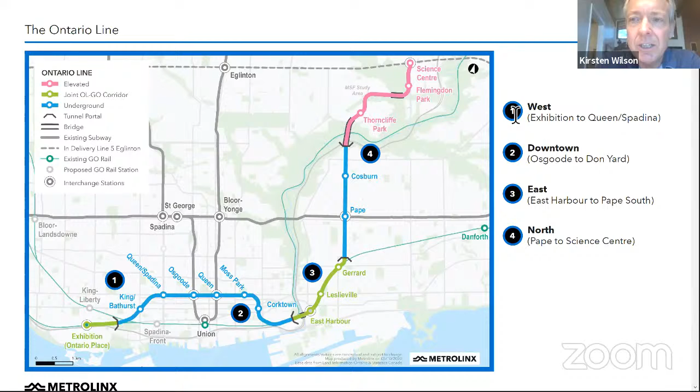We've broken it into four parts: the west, the downtown, the east, and the north. This is probably a good time for us to talk about our public consultation and briefings. Josh, perhaps you'd like to talk to that.

Sure. Like Malcolm said, the website has been our primary vehicle for getting information out to people, and we were excited to release the latest update. It's always challenging in a project like this because a lot of work has to happen in the background by our engineering and design teams before we can share it with the public. But we factored in a lot of what we heard from the open houses in January and February, posted that information online starting a few weeks ago, and are now concluding meetings with elected officials and beginning more public meetings.

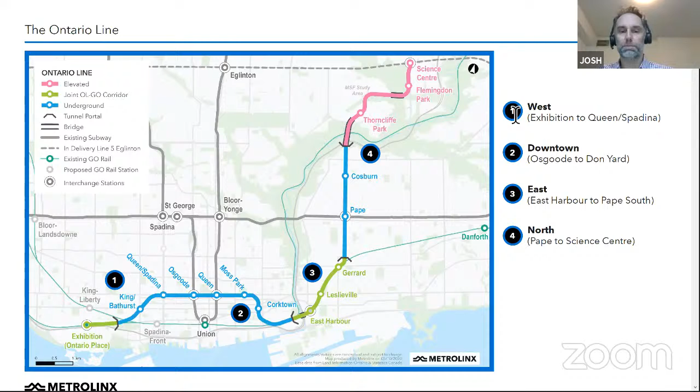This is actually our first of what we hope are many open public meetings, and we're really grateful to MPP Glover and his staff for hosting us. We're also looking forward to opening a couple of community offices, hopefully by the end of 2020. That'll give us a chance to talk with people in various neighborhoods along the alignment, answer questions, and keep you updated as the project progresses. Thank you, Josh. We could go to the next slide.

So some of the benefits associated with the Ontario line. One of the primary benefits is the relief to Line 1, which is very congested, especially south of Yonge and Bloor and at the Yonge Bloor station itself. We're anticipating a significant reduction of almost 19% at Yonge Bloor station, and we're also projecting significant congestion relief at Union Station, as well as at the Line 1 interface up at Eglinton Station.

We're also building the Ontario line into some new communities, Thorncliffe Park and Flemington Park, which are priority communities for us to get higher order transit into, so that travel times to their places of work, entertainment and back home will be cut almost in half, which is a true benefit to the customers we'll be serving.

We're breaking the project up into three very large contracts. The first is the Rolling Stock Systems Operations and Maintenance contract, which we call the RSSOM contract. It's a design, build, operate, maintain contract. They'll be responsible for installing the systems, the vehicles, the maintenance and storage facility, the control systems, the control room, and then they'll have a 30-year concession operating and maintaining the Ontario line.

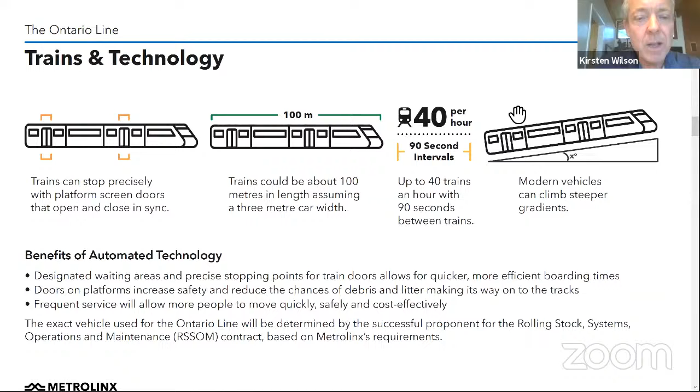The benefits of these trains is that they're completely automated, which means the stopping and starting points are very accurate. Coming into the stations, the stopping and acceleration out of the station is very controlled and programmed to ensure a smooth, comfortable, quiet ride for our customers and for the community we're going through. The entire program allows us to come in and out of the ground on slightly steeper gradients, which enables us to come out up in Thorncliffe Park, as well as along the shared corridor.

I'm going to pass this over to James Francis now, and he'll talk about the environmental reports that are currently out for comment. Thanks, Malcolm.

So as Malcolm mentioned, we currently have our first round of environmental reports out for public review and comment. This is the draft environmental conditions report. In it, we look at existing conditions for the environment across the entire Ontario Line study area, tip to tail from the Science Centre to Exhibition, covering aspects like archaeology, cultural heritage, noise and vibration, the natural environment, socioeconomics and land use, air quality, traffic and transportation, and soil and groundwater.

So we're very much seeking your review and any feedback you may have on this report. It's on our website, and once we digest the comments we receive, we'll update the report and post the final version on our website for review.

Looking ahead, we are planning early works at Exhibition Station, the Lower Don Bridges, and along the Joint Corridor, and we'll be undertaking an impact assessment looking at the environmental impacts of those specific works, sharing that for public review and comment in a draft early works report. We anticipate sharing that later this year.

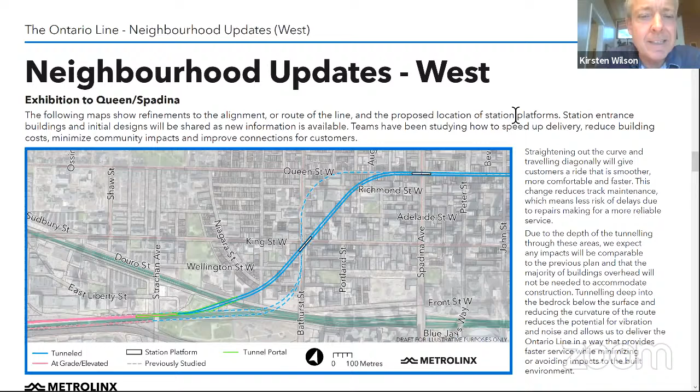This is Exhibition. One of the areas we're quite excited about is bringing higher order transit down into the Liberty Village area, and Exhibition Station will have direct access to Liberty Village. We're coordinating well with the city and TTC to build the new Liberty Street, which has an environmental assessment completed. This station will also interface with GO Transit and GO operations to provide an alternative to get downtown without going through Union Station. It'll also be a destination for access to the exhibition, all its amenities, as well as Ontario Place.

Next slide, Josh. So in order to launch a tunnel boring machine, we need to dig a hole in the ground and drop the tunnel boring machines into those holes and then progress.

One of the places we're intending to begin tunneling from is Ordnance Triangle Park. We're going to occupy that park for a period of time, and we'll try to maintain as much of it as we can, but it is a fairly large operation launching a tunnel boring machine. There will be two of these machines going from here towards downtown and towards Queen Station. When we're done, everything will get filled back in, and we'll return the park to the city to develop the programming spaces in this area.

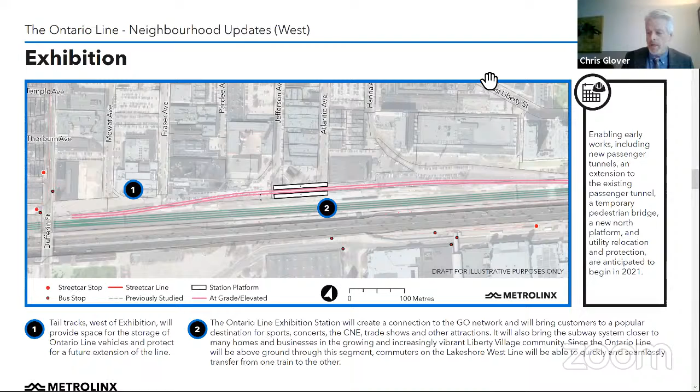Next slide. Actually, I've got a couple of questions about Exhibition station, so maybe we'll just take them now. Where exactly will it be located, and what will it look like in terms of size and accessibility? And the final question is, why are there no stops between Exhibition Place and King Street? Wouldn't it make sense to have a stop that serves the Fort York City Place area?

Okay, so first off, we're building the station on the north side of the existing GO corridor. The intent here is to have a through-pass that will allow community members up in Liberty Village to use the subway station to get to Exhibition, BMO Field, Ontario Place, or any of the amenities at Exhibition. It will be accessible in the sense that we'll have redundant elevators for accessibility at all times, as well as stairs and escalators.

Regarding your question about an interstitial site or station around the Fort York area, we try to space our stations at certain intervals that make sense. It's a challenge when you have stations too closely spaced, and we do have a few that are closer than we'd like. It really affects our ability to maintain headways properly.

When we evaluated the areas, we wanted to, number one, serve neighborhoods, and number two, have good connectivity with the existing surface transit network. At King Bathurst, we pick up both the Bathurst and King streetcars, which will be very beneficial to the crowding currently experienced on both. The opportunity to add an additional underground station there, we didn't feel it would be well served. We're better served with the locations we have.

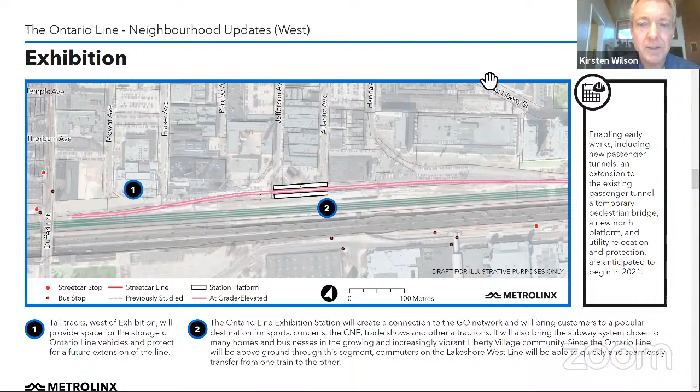Stations are the most expensive component of the subway build. They come in anywhere from $250 to $350 million each, so you want to site them very carefully and not install too many. Thank you very much.

Next slide. As we go into the downtown section, this runs from Osgoode all the way down to the Don Yard, and is a downtown component. It's tunneled construction in a very dense neighborhood, as was the West.

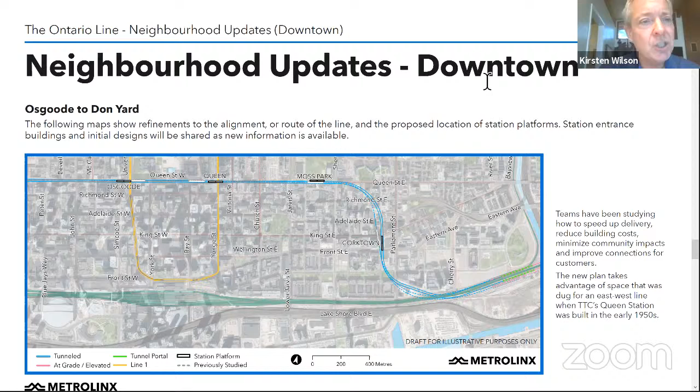Next slide, Josh. Osgoode Station looks a lot like the Relief Line South station, except we've moved it a little further to the west. In doing so, we're now straddling Line 1, which makes connectivity much better between Line 1 and the new Ontario Line. We're building two new entrances, one on the northeast corner near Osgoode, and one on the southwest corner near Simcoe Street.

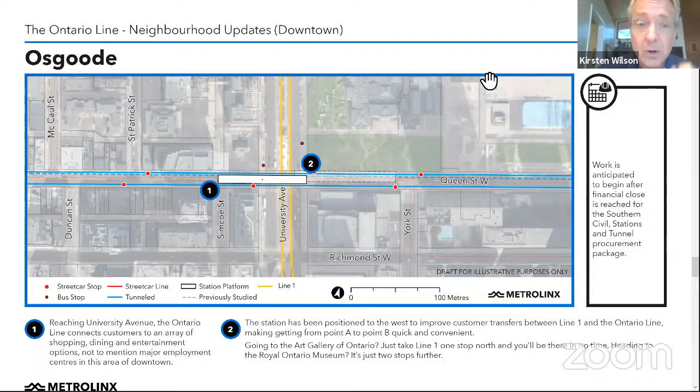Next slide. This is Queen Station. Similarly, Queen Station was a little further west. We've moved it during the design evolution a little further east to again straddle Line 1 at Queen Station, to create connectivity to virtually every corner here. This is also a very important station for us because it has great connectivity to the PATH network, which will allow people to get to their places of employment much easier.

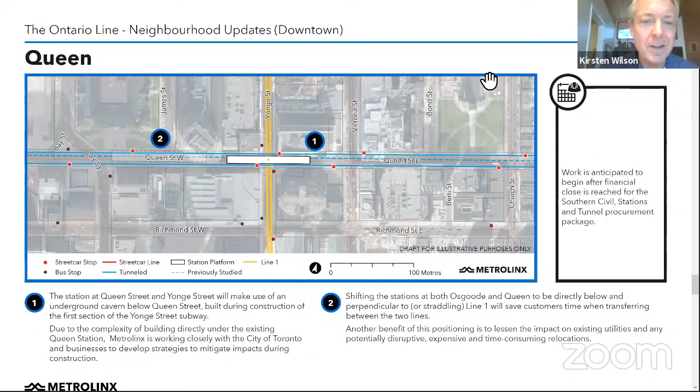So Malcolm, last time I had this briefing, you mentioned Queen Station has a GO station under Queen Street that was designed for this, and that you're actually going to be utilizing that station. Is that accurate, or is that still in the plans? It's actually not a GO station, it's a TTC streetcar station. There were aspirations long ago that the Queen Street streetcar might go underground in this location. There's infrastructure built there, and we're going to tie into that in order to get underneath Line 1 to both platforms on the east and west side of the existing Queen Station. So we're absolutely going to be utilizing the infrastructure that's there for our benefit. Okay, thank you.

As we move further east, we come to Moss Park. Here we're moving the construction out of Queen Street, and we're going to do it in an open cut format. We'll have an entrance on the corner of Sherbourne and Queen Street. The reason we moved it into the park is we're trying to minimize impact to the road network, because we're constructing across the entire city, 15.5 kilometers, 15 stations. It's a lot of work to be executing in the same period of time. This is a very important station because it also serves priority neighborhoods north of here.

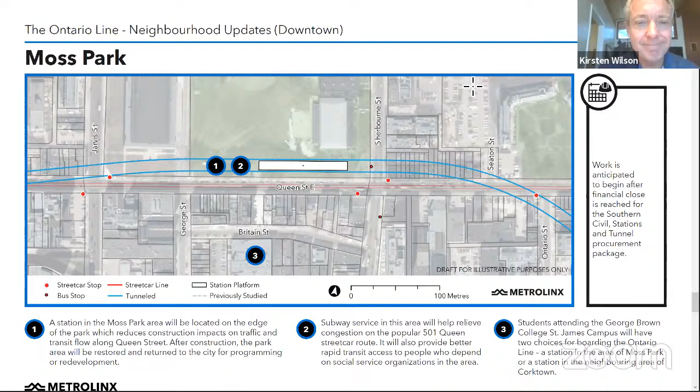Next slide. Then as we turn south, we come to Corktown Station. Just so you know, the naming convention right now of the stations is they're called working names.

And they're representative only. We go through quite a process with community engagement, as well as the TTC and Metrolinx, to develop the final names of the stations, which we'll be doing in the next year.

This station, we also moved out of the Berkeley Street road allowance into a development site. This site is also exciting because just south of this station, there's a property called the First Parliament site. It was the home to the first Parliament, which got burnt down, the second Parliament, which was the replacement. It was also home to a jail, and then after that, a very large consumers gas plant. And before any of that was built, it was the home to the First Nations people.

So we're going to be doing a very extensive archaeological investigation of these lands, just south of the station. We're eventually going to use that site to launch tunnel boring machines that will go north and west towards the downtown. We're doing this to be able to deliver the subway as quickly as we possibly can.

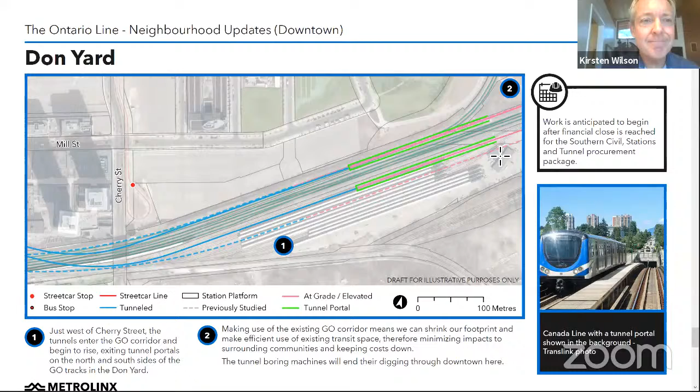This is when we would love to hear your thoughts and questions, MPP Glover. Okay, that's wonderful. Thank you. Yeah, no, thank you very much for that, Malcolm, and thank you, Josh and James.

So we've got a number of questions here. Let's start with construction impacts. How will construction along King Street east of Berkeley take place? What impacts will it have on the local community and businesses? And what measures are you taking to minimize the impacts on some of the main streets and the businesses there?

Yeah, so that's a great question. So we've actually moved and relocated the station box specifically to not impact King Street, not impact Berkeley Street, not impact Front Street, and maintain the traffic movements there. We're capturing enough land in this area to be able to stage effectively the construction. So with our eye on that construction point of view, we are mitigating early the impacts that large-scale construction like this can have to a community.

It also means that the King Street streetcar will continue to operate throughout the entire construction period. This is also an important station because it intercepts the King Street streetcar on the east end of the city, to allow customers an alternative to riding the very congested King streetcar.

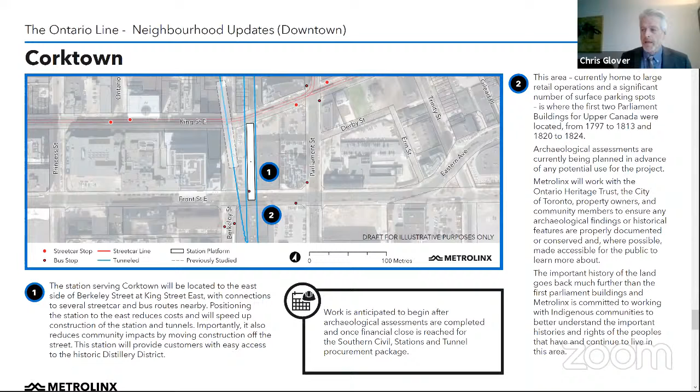The other question is about construction impacts on the condo towers. So you're going to be tunneling under a number of residences of all types across the route of this through the riding, and people are wondering what impact that will have on them. Will there be vibration noises in the houses, in the condos, etc.?

Okay, I can speak to that. I'm going to talk about the geology of Toronto. So between the surface of the ground and the top of bedrock is a layer of sandy, silty soils. And then there's a layer of shale that continues very deep below that.

The tunneling operation, when the proponents are looking at it, will either be shallow in the sandy materials or deep in the shale materials. You would never run halfway between the two, because it's very hard on the equipment to have a very hard substrate on the bottom half of your machine and a soft soil on the top.

What we've evaluated is that the interferences associated with shallow tunnel boring, as well as the potential for settlement and those things, mean that we're very likely going to be a very deep, reasonably deep tunnel operation entirely in shale. That means entirely in very competent rock. That in and of itself helps mitigate, just through distance, noise and vibration, but also the tunneling operation through a homogeneous medium like shale is very fast and effective.

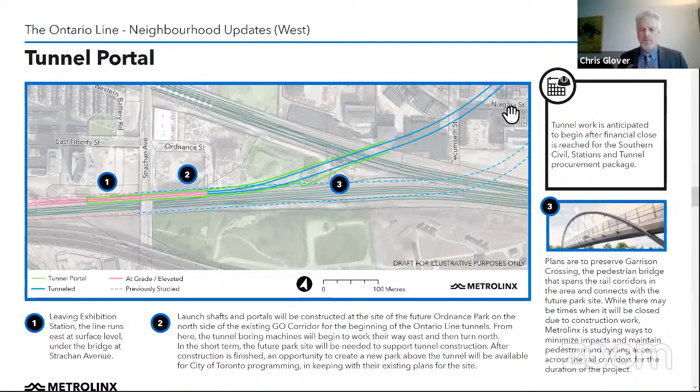The other concern is around the construction impacts. I know you mentioned you're rebuilding a couple of stations along Queen Street, and there's a couple of new ones being built. I've got a few different questions here: How long will those streets be closed? And what will be the impact, because that will affect the local businesses.

At King and Bathurst, we're not anticipating street closures. We're intending to use a form of construction in this neighborhood called SEM, sequential excavation method, which is mining underground. So there's no big open cut here. There'll be where the station entrance is going to be, the way they get in and out of the station for that work, which really minimizes the impact to the community associated with building this station in particular.

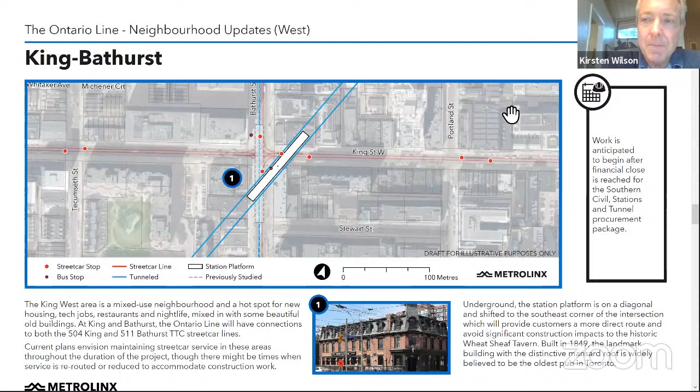If we go to Queen and Spadina, it's the exact same story: a sequential excavation method, mined construction, so there won't be a big open cut. Again, it protects the neighborhoods, it protects the surface transit network, and it protects the traffic in the area.

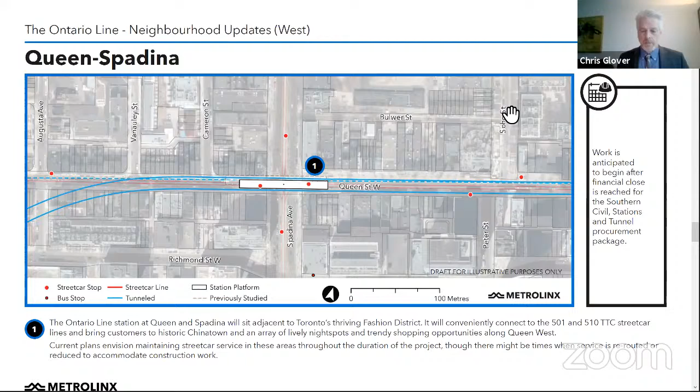The final question we'll take is from the East End, about the railway corridor on the East End that eventually feeds into Union Station. It's the addition of a set of tracks on the north side of the existing tracks, which will be in close proximity to some of the residential buildings there. There was a plan from GO Transit, eventually abandoned, to build what they called a zero track there, with noise abatement measures for those residences. Will this new track be close to existing residences, and what noise abatement measures will be taken to address some of the concerns that the residents have?

A couple of things: you're talking about the construction in the Don Yard area. Coming into the Don Yard, we're underground, and then we emerge through the portal. The portal is immediately adjacent to the existing four-track corridor, so it's quite close. On the north side, there's the Richmond Hill line that separates us from the neighborhood there, so our proximity to the neighborhood is relatively distant. We're electrically operated, so we don't have large diesel locomotives, which are soon to disappear also with GO Transit. Our running noise is much lower than the ambient noise produced by the existing GO traffic in the corridor.